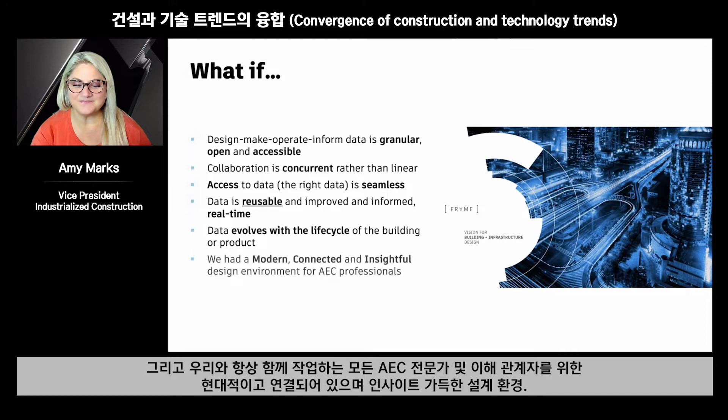Are you really ready for that change?

There's actually a formula for change. This formula was made by Dannemiller, and it's change equals dissatisfaction. You have to first be unhappy with the way things are now. Either you are unhappy with the way things are, or you have aspirations and you're unhappy and want to get to that next place. You have to have a vision for what's possible, and hopefully I can show you a little of that vision today.

You then have to have first concrete steps of action. You need to know what to do next. And that all has to be greater than resistance. A lot of that resistance will come internally, sometimes from your own companies, but also resistance externally in the environments in which you work. But that formula, change equals D times V times F, has to be greater than that resistance.

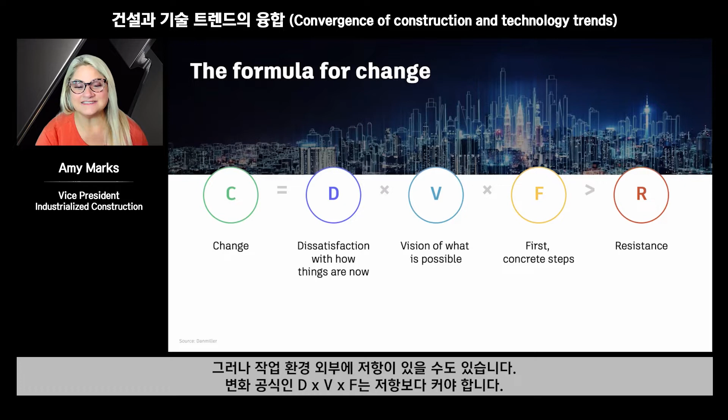So let's talk about that word convergence. It's the blending of what used to be previously separate technologies and processes, that data that now creates new combinations of products and services and experiences that reshape whole industries and structures. So convergence is about technologies that, this used to be just my phone, but now it's my phone, it's my map, it might be my babysitter.

It's not just my phone anymore. It's about the convergence of different processes. So what used to be just design might now be design and build. It might be design with the understanding of carbon and embodied carbon. So it's the combination of different processes that are now blending into one.

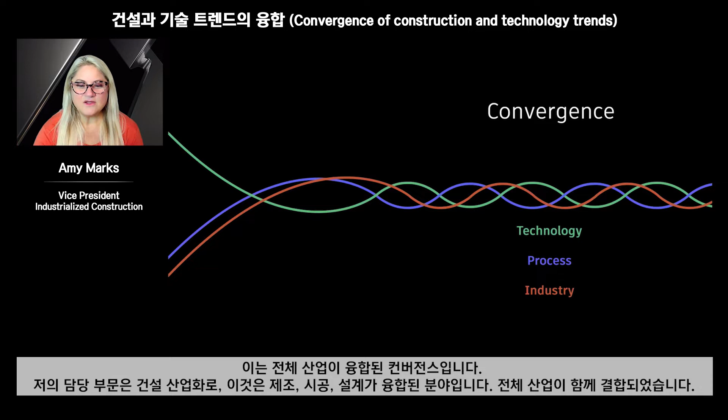It's the convergence and melding of whole industries, which is why my title is Industrialized Construction, which is the convergence of manufacturing, construction, and design. So whole industries are coming together, which means business models are changing and combining together. And that's where a lot of the change is really happening for all of you and for many of the large owners and governments that are actually changing the way in which they do work.

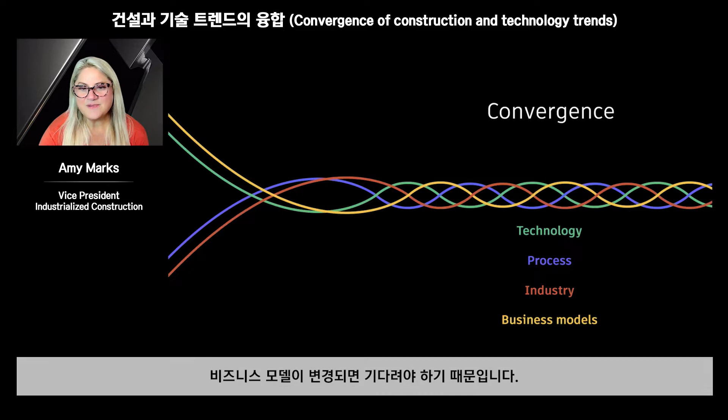Because when business models change, we have to think about the ways in which humans and machines are now interacting to do that work, because that's really changing. And it changes the way we think about sustainability and how that's impacting the way that we want to do the work and the result of the work and how that's going to impact our world.

So let's do a little bit of a quick recap for those of you who may be new to this conversation. The dynamics are changing, and McKinsey did a report in June of 2020, right as the pandemic hit. They talked about how, over the next decade, almost half of the $14 trillion in value of the design and construction world is going to shift towards industrialized construction. And why is that going to happen?

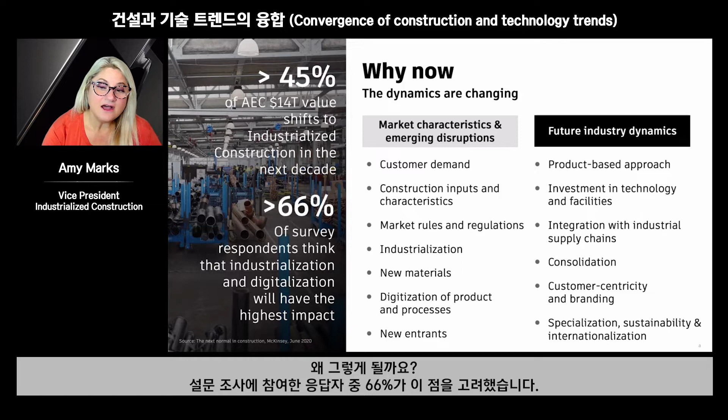More than 66% of the people that took the survey thought that the market characteristics and emerging disruptions happening are pointing towards industrialization, those manufacturing techniques applying to construction, and the digitization of product and process in the design and construction space were making the highest impact. In fact, they said over the next 1 to 3 years, which is about now, a product-based approach would have the highest impact on pushing us over that 45% mark of industrialized construction in the next decade.

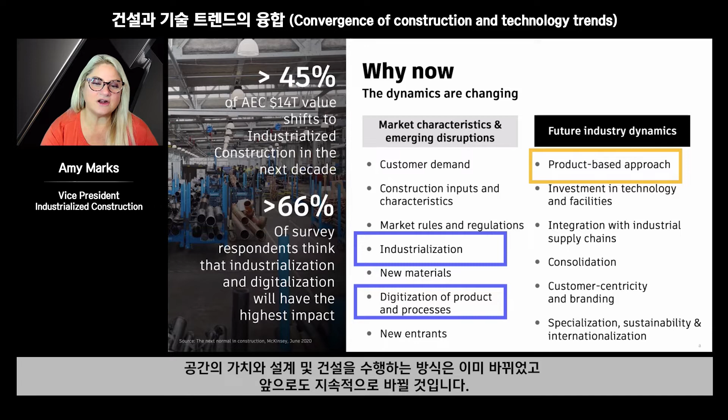So things have already changed, and they will continue to change in this world on how we're going to be executing on all of the value in design and construction in our space. But we have to take a look at what has been plaguing our ecosystem for many years and why BIM and smart construction can really help solve that.

We really know that assumption-based design has been the source of uncertainty. And we want to make sure that although building information modeling is very important, we have to stop that iterative process to make sure you're connecting the building information modeling tools to the information of the makers, so that the I in BIM is informed by intelligent design.

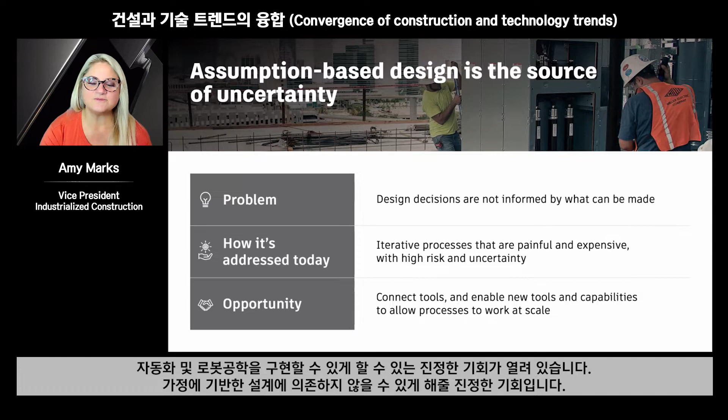It's a real opportunity to connect how tools will enable new capabilities and allow processes to work at scale to enable more sustainable practices and smart construction, to allow for automation and robotics. That's the real opportunity now, so that we're not beholden to assumption-based design. And that means business models are changing for all of you.

We know that industrialized construction has certain technology and process enablers as we're shifting into this new world. And we're in a highly instrumented world of things that have IoT sensors, machine learning, and AI that we can apply to many of the products and processes in our space.

That's giving us a lot of data and analytics that we can sort through and understand in a different way. And many of our products at Autodesk, if you went to Autodesk University, have moved to the cloud in an open platform.

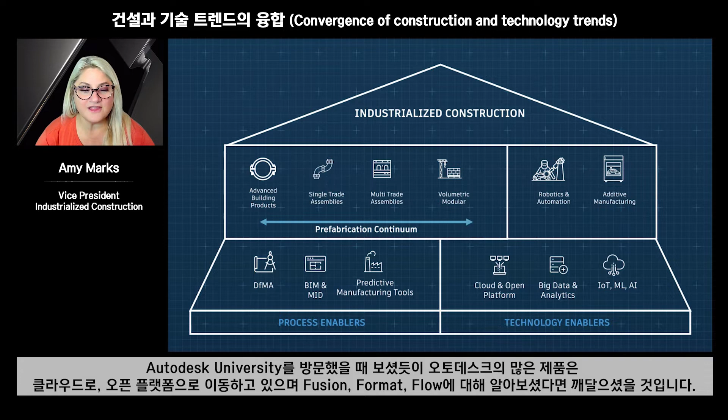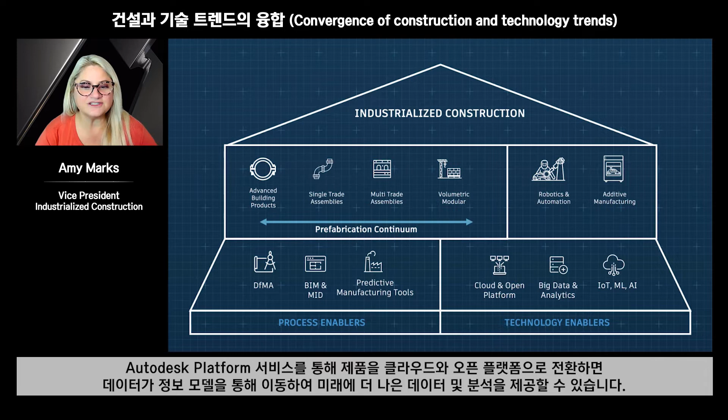If you're learning more about Fusion, Forma, and Flow and the Autodesk platform services, you'll see we're moving our products to the cloud in an open platform so that the data can actually move across those information models to give you better data and analytics in the future state, so that as things are instrumented, we can have more understanding about what's actually moving across the life cycle of these products and their performance.

So in the process enablers, we can actually have more predictive manufacturing tools, and that really you can have building information modeling, which is happening at a higher state in your country, but you can take manufacturing information and inform your BIM models with what things can be made.

Because ultimately, we want to understand not just design for manufacturing and assembly, but the data that is moving that to the next level of understanding.

Because we want to move up in the house of industrialized construction to not just prefabrication of products, but true manufactured products, from advanced building products to single trade assemblies, multi-trade assemblies, and volumetric modules. Again, there's not a hierarchy, but we want to use everything in our toolkit across these physical products.

And we want things to actually be real products that we can reuse and understand the data associated with each of those, so that we can understand things like digital twins and how these products are performing over time and the data associated with them.

So that we can apply advanced building methodologies like robotics and automation to those products as we make things, and additive manufacturing and things like 3D printing, so we can use the most efficient advanced methodologies to make the products that are going into these buildings, and sometimes the buildings themselves.

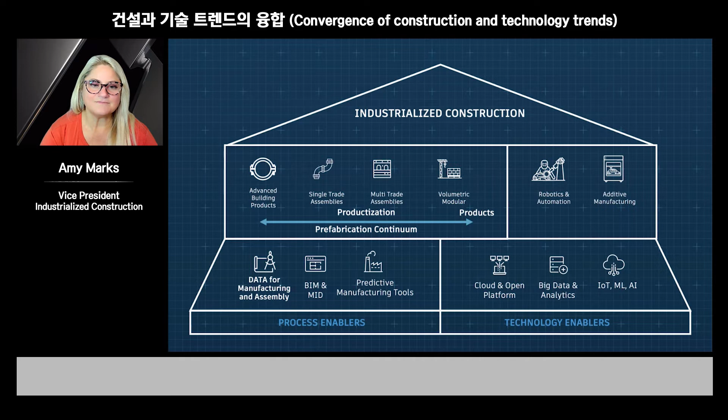And many of our customers, because of that, are changing. What has been previously a siloed focused customer base is now looking more vertically integrated, as many of you know in your region, where a customer may have many of these capabilities now within their own business models. And so you're seeing many different types of customers now.

We had architects and engineers that are moving much more towards a generative designer.

They want to use more tools in their practice, taking their domain expertise and building digital products they're using on the Autodesk platform to productively use those digital tools in their work, to automate things and use generative tools to pick the right combination of products. We have contractors that are looking more like systems integrators, understanding the right combination of products and how to accelerate incorporating them in situ on site.

We have a lot of building product manufacturers that want to put a combination of products to inform the designers up front for things like carbon analysis and the right combination of products that can hit the right performance requirements, that want to move to the front of the process instead of far downstream.

And we have many big owners, including our government owners, that want to understand the data so they can use the right combination of products for the best outcomes and own the data so they can understand things like digital twins, so they can have the most productive builds that are capable of reuse and a life cycle of carbon, to understand the best use cases for buildings they're owning over a long period of time.

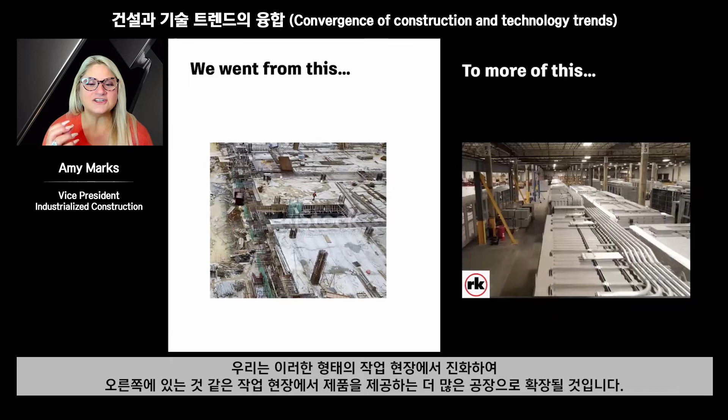And that's why the data is so important, right? We know data is going to be so important because we went from job sites that looked like this to more factories that are providing products on job sites that look more like those products on the right. And there is a difference even between prefabrication and products like that generator you're seeing there on the right. And why is this happening now?

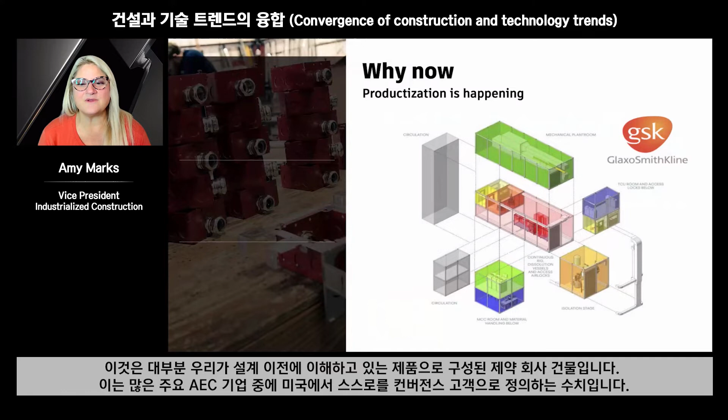This is a pharmaceutical building that is mostly made by products we are understanding before the design. Many of our leading AEC companies, this is some numbers from the United States, are defining themselves as these types of convergence customers that are thinking in terms of creating products instead of just understanding construction or design as a process. So they want to have reusable products that they understand the data around.

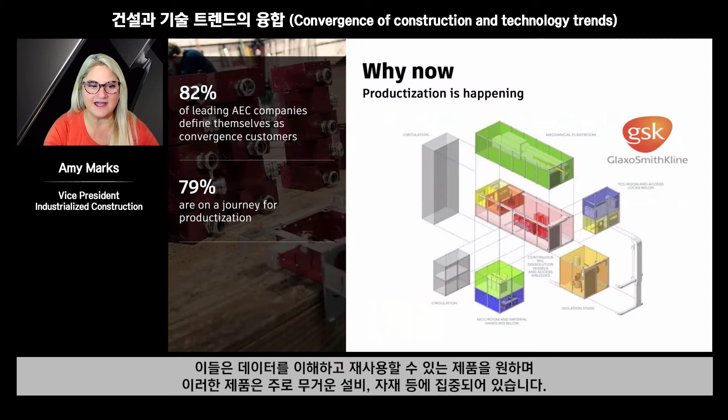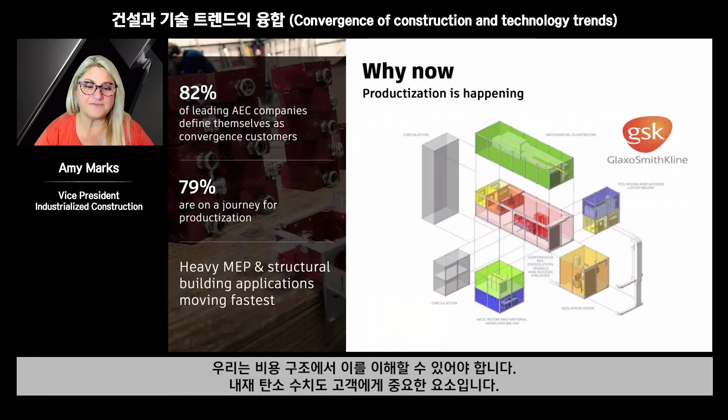Really, those products are focused mostly around the heavy mechanical, electrical, and plumbing services products, and also the structural building applications, moving fastest especially in concrete and steel, where much of the embodied carbon lies. So we want to be able to understand that from a cost structure and also embodied carbon numbers, because that's really important to our customers.

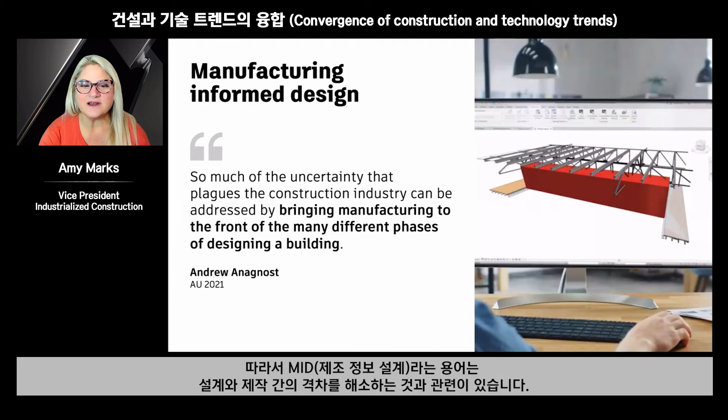And really, it's not just the productization of the physical piece part, it's the productization of the data. As Andrew Anagnost, our CEO, said a couple of years ago, there's so much uncertainty plaguing our construction industry that can really be addressed by bringing manufacturing information to the front of the many design phases of designing a building.

And so that terminology of manufacturing informed design is about bridging the gap between designing things and making them. We have to inform the design of products with their allowable customizations, and we have to do that using tools that only allow us to design with what is allowed in the variation of manufacturing, so we can automate fabrication and documentation information of what can be made later.

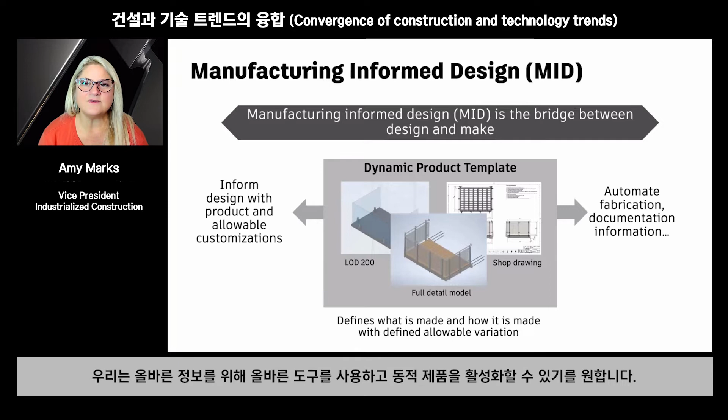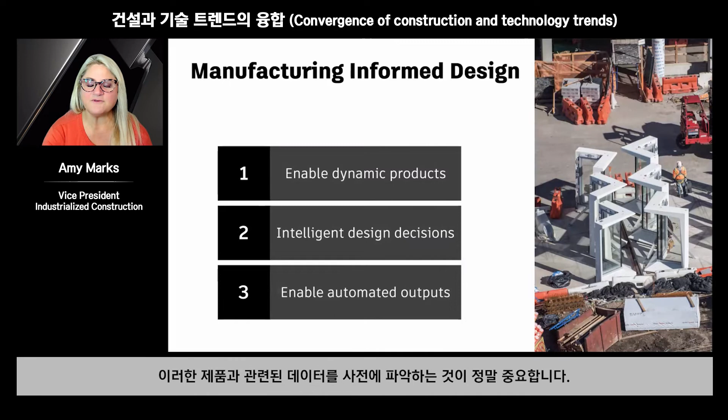We want to make sure we're using the right tool for the right information, and that we can do that while still enabling dynamic products, still making intelligent design decisions for both manufacturing and for things like embodied carbon and carbon life cycle, so we can enable automated outputs and automated advanced building methodologies like robotics and 3D printing. That's really important if we can understand the data associated with those products up front.

In order to do that, that little product that gets designed has to have a data backbone and a data packet associated with it that references that data up front and the specifications necessary, so it can travel across our Autodesk platform services, formerly named Autodesk Forge, and we can understand those products as we inform design and how we're making it, and then how we're assembling it on site.

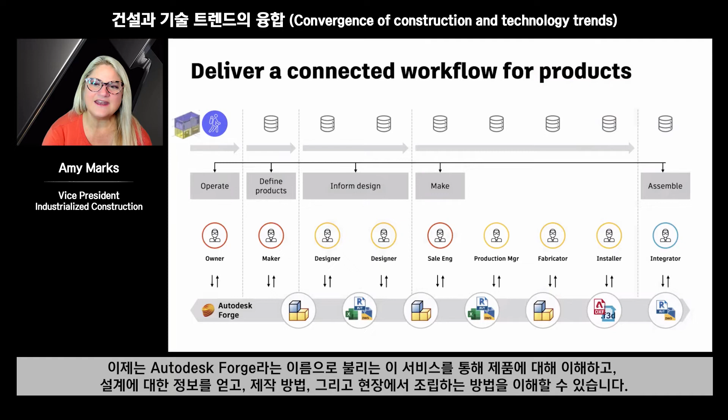So you'll see it's not just starting with design, but starting with the operate information of the end user and what's necessary, and then defining the products that would actually inform the design first, not a design that doesn't understand the products that would actually make from the makers.

We have to really kind of flip the script, right? So the I in BIM must be informed by the maker first, and then we can assemble the design from those piece parts, and then make those things after the design has been assembled, and then assemble them on site.

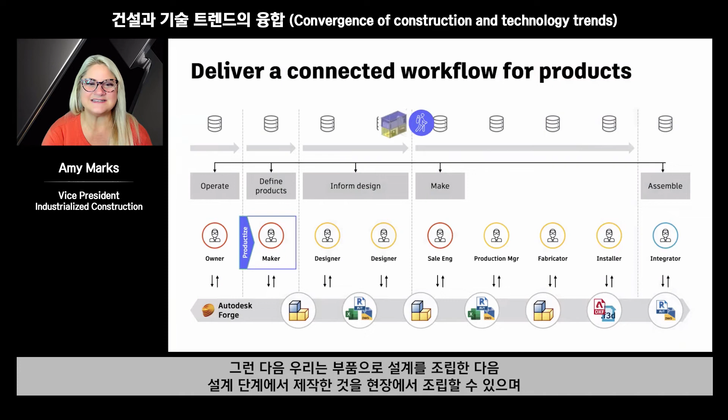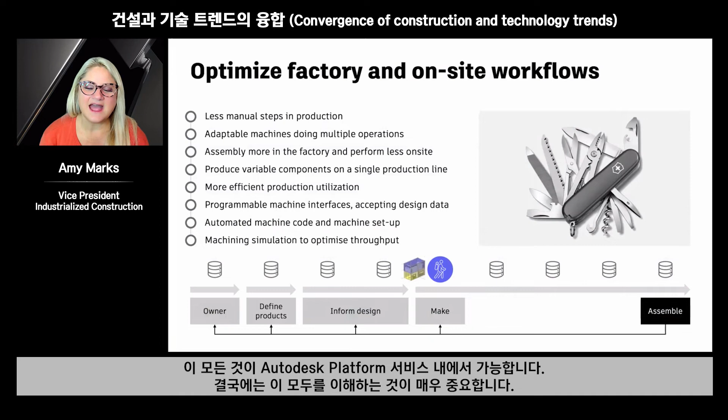And that product can actually travel across the Autodesk platform services with that data intact and instrumented for things like digital twin, so that we can optimize our factory and on-site workflows in the most efficient manner by using not only our design tools, but our manufacturing tools and construction tools, all on the Autodesk platform, as well as our partners' tools that work within our Autodesk platform services. At the end of the day, you truly want to understand how the building is operating from both a descriptive twin to an autonomous acting twin.

We really understand both the information modeling and manufacturing informed design. We want to truly understand standardized data structures, but enable a repeatable and scalable process so that every time you build a hospital or a data center, it's not as if we've built that hospital for the first time every time. We want reusable components and kits of parts, understanding their performance over and over, improving them, especially if you're driven by large owners or government entities that want to improve building performance for the people they serve.

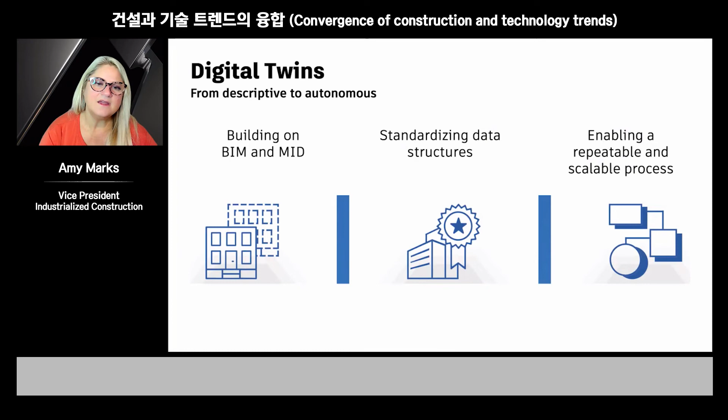So you've noticed that at AU, we talked about new names and how we're working on our cloud information models to connect them together, so that, as an example, the smartphone is a result of convergence. As I held up my phone before, it's on the Apple platform. The Autodesk platform services also has other apps built on our platform right now, and we have many partners that have built apps on our platform that work seamlessly with our Autodesk products. I do believe there will be many more built.

And I like to say to our customers, maybe you will be the next Waze, which is a directional capability, or the next Spotify or the next WhatsApp on the Apple platform—so on the next Autodesk platform. There are lots of apps being built by our customers on Autodesk platform services now that many of our customers will have access to in the future.

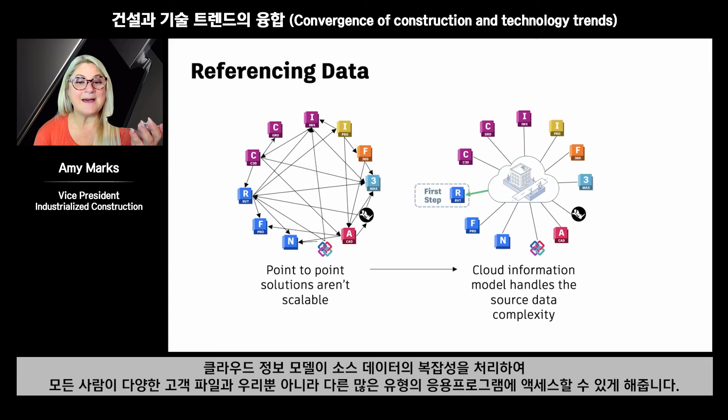Because it won't be about point-to-point solutions—those aren't scalable. It will be about how cloud information models handle source data complexity, so that everyone has access to many different kinds of customer files and many different types of applications, not just ours, but others, and they'll be able to take that data and use it anywhere they want. It's very important that we all learn how to work together.

That's where I work, in the consulting and customer success organization, where we're agnostic to the tools we're helping customers use. We're helping them use the entirety of the breadth of the platform services, working with thought leaders and storytellers like myself for custom solutions that haven't been built yet, out of the box. We can use the local knowledge and teams you have in Korea and your region to help with the nuance of our partner network there, providing local insight for regional challenges and opportunities, while still using the experience and expertise around the globe to make what you're doing even more successful.

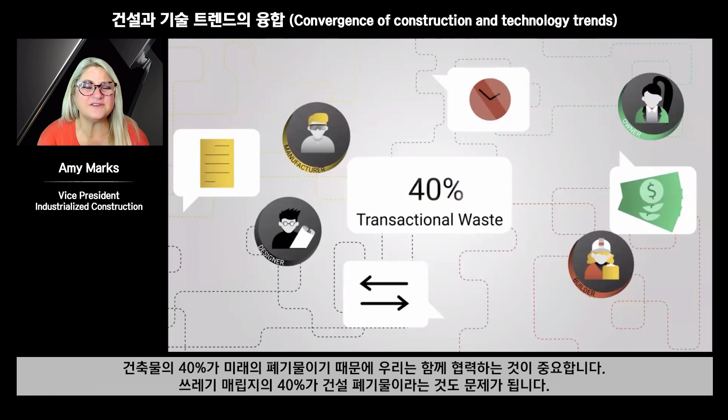I would encourage you to reach out to your local representatives to talk more about how we can work together. It's important that we get there together, because 40% of a building these days is actually transactional waste, and what's worse is that 40% of what's in our landfills is construction waste. Much of that digital waste exponentially leads to physical waste. We can stop that if we work together using building information modeling and smart construction techniques.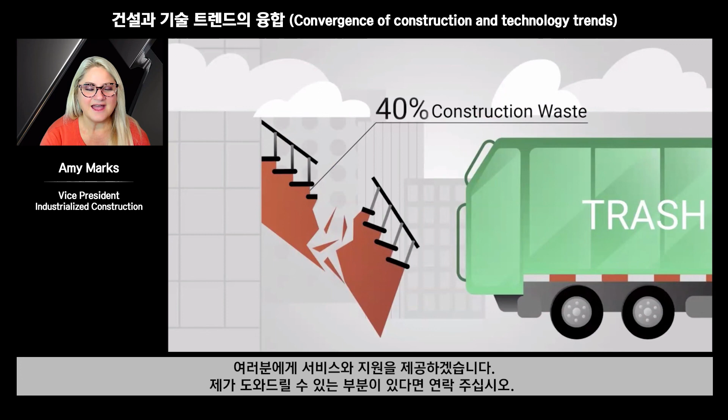I would hope that we can all work together to make this a better, more productive planet for everyone here. So I offer our services and my help to you—if I can ever help, please reach out. I'm more than happy to work with any of you at any time to answer any questions.